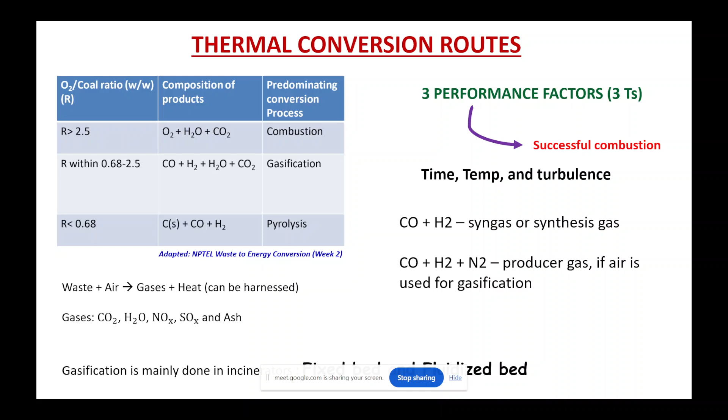Any questions so far? Anyone? No. Okay, so let me continue.

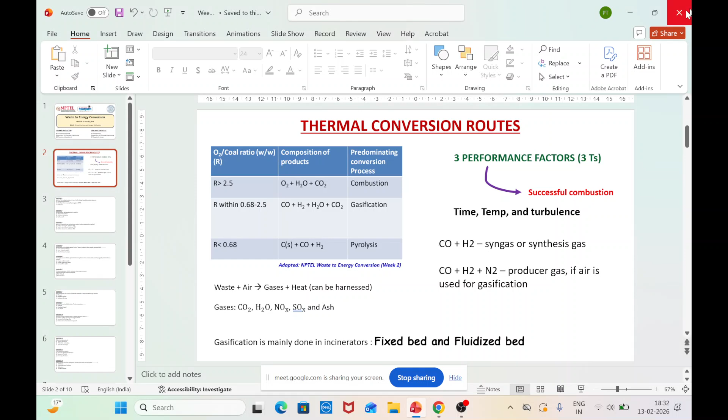What we typically obtain through gasification is syngas. Now, what are the uses of syngas? Before discussing that, let's talk about how gasification happens within the system. For gasification we use something called a gasifier, like the different types of reactors we discussed for incineration. I hope everybody remembers grate firing. Please try to recollect those, because the same type of reactors will be used in gasification.

Gasifiers are the reactors in which the gasification process is conducted. There are three types of gasifiers: fixed bed, fluidized bed, and entrained bed gasifiers. In the case of fixed bed gasifiers, you have two different types.

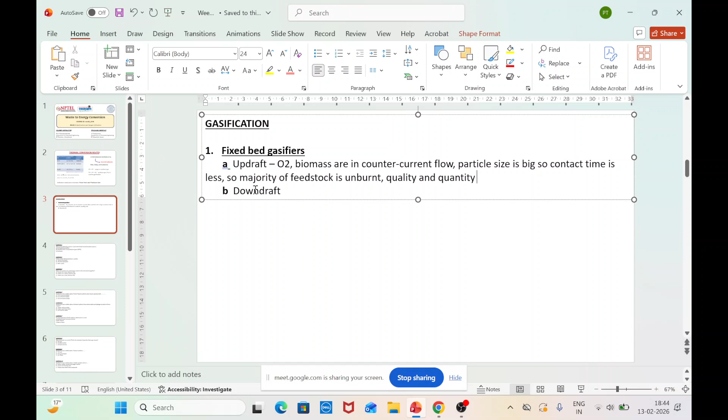I'm going to use the word unburnt. So quality and quantity of syngas is reduced. Syngas temperature is low. Unburnt feedstock leads to blocking and channeling of reactors.

So with this blocking and channeling of reactors, there can be a thought: why can't the reactors be cleaned to remove the scales and deposits generated from this unburnt feedstock? But we have to keep in mind that these gasifiers are very long systems, and cleaning them requires a complete shutdown of operations, and such a process is very time consuming, and commercially speaking it is infeasible. So of course fixed bed gasifiers are being used, but they have many limitations.

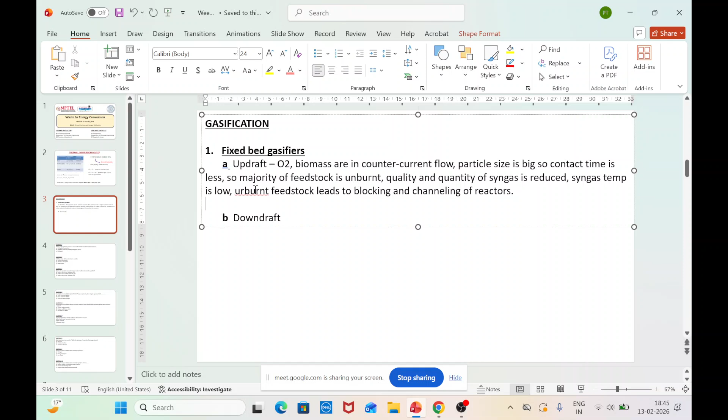In the case of downdraft gasifiers, these problems are reduced. However, there is another problem: scaling up of the gasifier is difficult in downdraft gasifiers. So overall, the temperature required in the case of the fixed bed gasifier is very high, 1500 to 1800 degrees Celsius. So this is where we go for a fluidized bed gasifier, which requires much less temperature compared to fixed bed gasifiers. If you remember, in the combustion or incineration process that we studied last session, we also discussed the fluidized bed and the fixed bed. I hope all of you are able to remember.

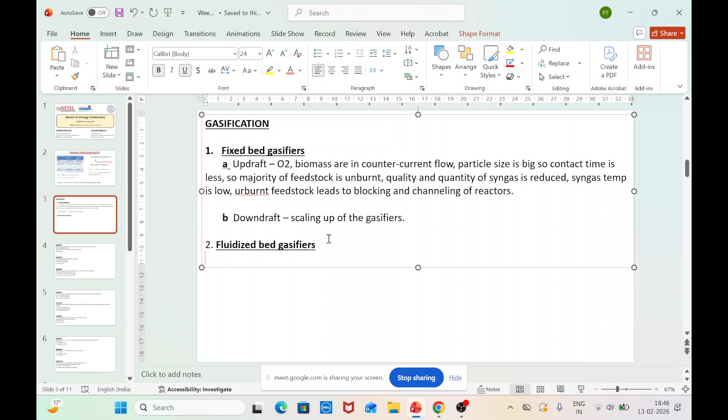So fluidized bed gasifiers are also classified into two different types. Here it will be three, but does anyone know the two different types of fluidized bed gasifier? Yes, we did this last week. It typically depends upon the velocity of the airflow. Circulating, yes. And another one. First one is circulating, and then there is another one. It is the bubbling fluidized bed. And here you also have the third, which is the dual fluidized bed reactor.

Before moving on to the dual fluidized bed reactor, as I said before, the bubbling and the circulating fluidized bed reactors typically differ in the velocity of the air flowing inside. Both of them usually use sand media, and the air is passed inside the fluidized bed gasifier, which causes the sand particles to move. Once you feed the reactor with the biomass, the feed particles and the sand particles come in contact with each other. You also provide temperature, which causes heat transfer, resulting in the burning of the particles, and the gasification process takes place, resulting in the combustible gases.

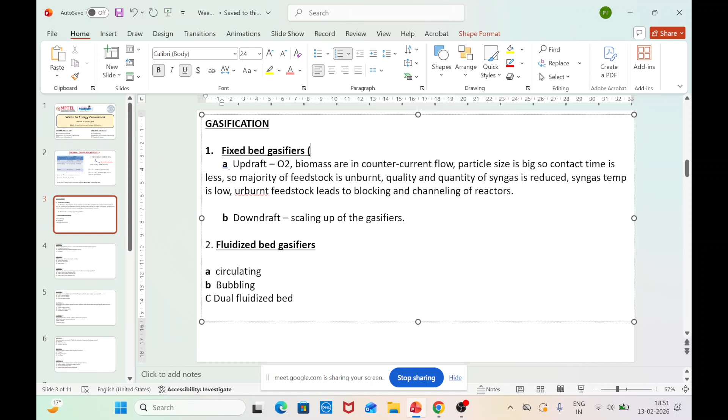So, what is the major advantage of a fluidized bed gasifier in comparison to the fixed bed gasifier? This we discussed in the last session. Okay, let me give a hint. In case of a fixed bed, the operating temperature is between 1500 to 1800 degrees Celsius. However, in case of a fluidized bed gasifier, you can maintain the operating temperature between 900 to 1100 degrees Celsius. So you can reduce the temperature of operation for a fluidized bed gasifier compared to a fixed bed gasifier.

So based on this, I hope you are able to answer why a fluidized bed gasifier operates at a lower temperature compared to a fixed bed gasifier. Yes, anyone? Oh, we had answers, I'm sorry. Oh, okay, no. So anyone who knows why fluidized bed gasifiers are operated at low temperature? Kindly have a look at it. I will state the reason. It is typically because in case of the fluidized bed, the rate of heat transfer is comparatively high.

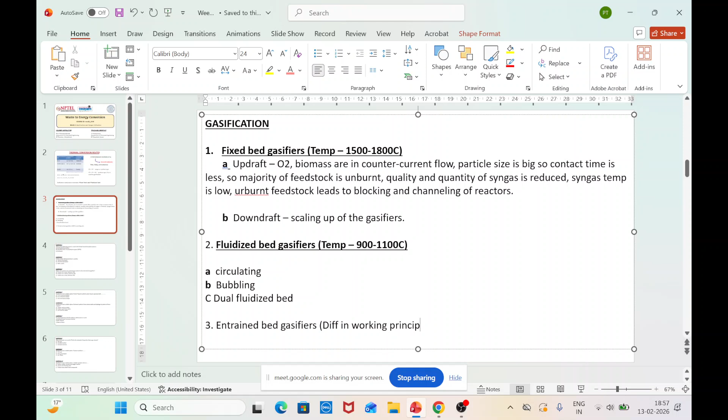So please have a look at them. Difference between all the gasifiers, difference in working principles. So please have a look at it. That's the reason I'm highlighting it with the different colors. So this is about gasifiers. Now I know what is a gasification process. I know how it is basically used. Now let's come to the most important part, that is what are the products that are going to come out of the gasification, which is nothing but syngas. And now how I am going to use my syngas for different purposes.

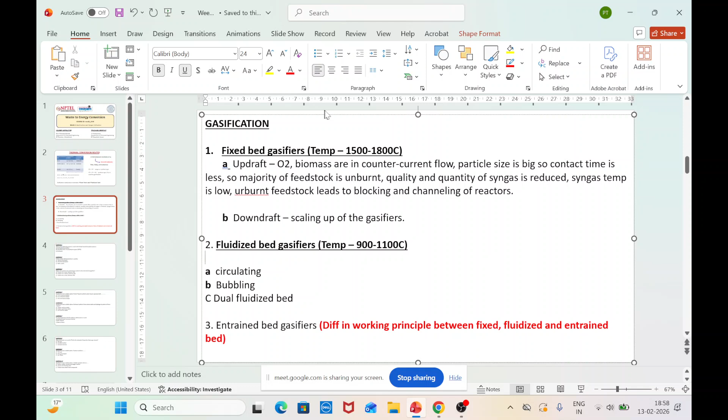So syngas is used for a variety of purposes. Among them, the very first use of syngas or synthesis gas is hydrogen production. This is the first use. Apart from that, the syngas as such can be used to run a gas turbine, and from there you can do electricity generation. And this syngas, depending upon the temperature, you can also use to convert water into steam, and then that steam can be used to run a steam turbine, which also leads to electricity generation.

After this comes something called chemical production. This synthesis gas or syngas can also be used to generate a variety of chemical products. One is methanol and its derivatives, typically speaking, liquid fuels. And another is that it is used in the Fischer-Tropsch synthesis process. Sorry, I think there is some spelling error. Okay. So these are the wide variety of uses of synthesis gas, or syngas.

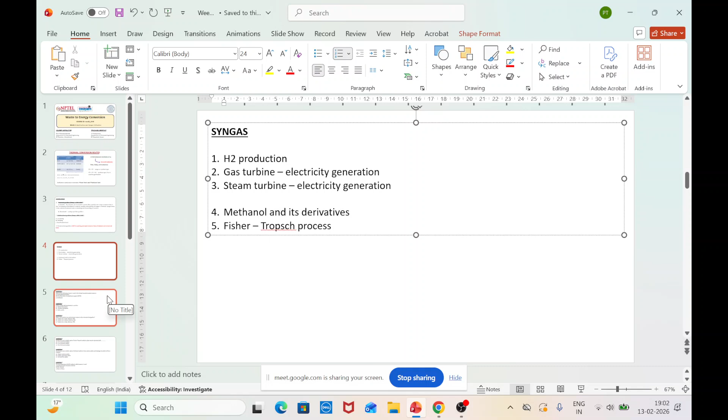Okay. So in case you have nothing to discuss, let's move on to the problems, or the multiple choice questions. The first question is which of the following solvents is used in the Selexol based absorption process. The first option is methyl diethanolamine. Second is dimethyl ethers of polyethylene glycol, DEPG. And third one is methanol.

Which of the following solvents is used in the Selexol based absorption process? Now, before moving on, let me know for what particular purpose we use Selexol as a solvent. Why is this particular question being asked here? What is it in relation to? What are we trying to absorb using these solvents? Or what are we trying to do here? Why do we need to go for all these absorption processes?

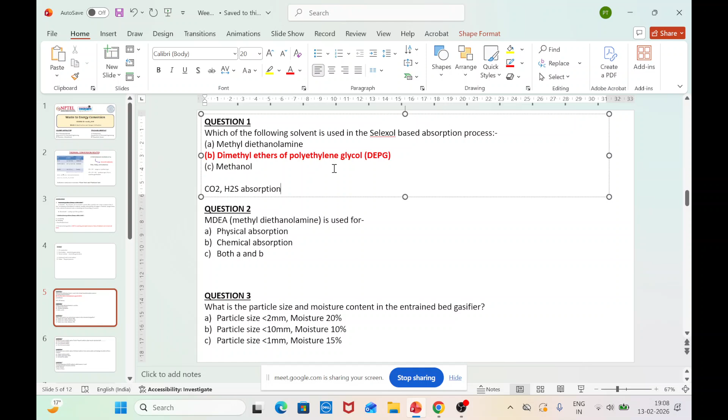So, in case of this Selexol-based absorption process, what kind of an absorption is it? Is it physical or is it chemical? Yes. So somebody has told that we are going to absorb CO2 and sulfur compounds. As such, when it is termed as sulfur compound, we mean H2S, dihydrogen sulfide. So yes, we are going to do CO2 and H2S absorption for syngas cleaning. And what type of absorption process is it? Is it physical or is it chemical?

No, I'm not asking for question two. We are still in question one. So this DEPG, which is used as a solvent in the Selexol-based absorption process. So is this absorption process physical absorption or chemical absorption? This is a physical absorption process.

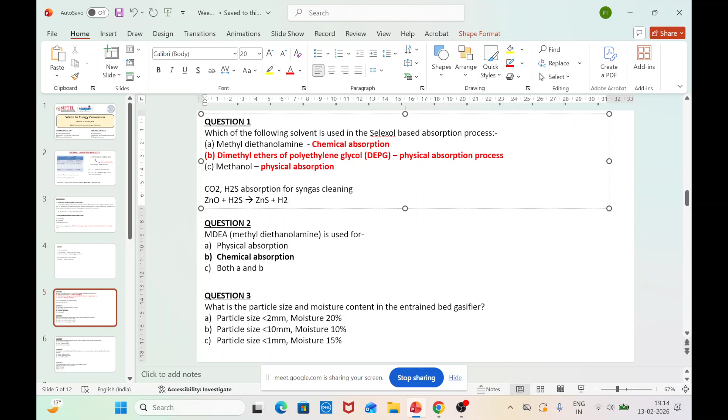So typically the reaction, I will write it here. So zinc oxide will react with the H2S and it will give zinc sulfide plus H2O. Now, just a second. Now, this zinc sulfide will react with oxygen to give back zinc oxide plus sulfur dioxide. So this is the total desulfurization process. So what is the second reaction called? The zinc sulfide is basically heated in the presence of oxygen to give zinc oxide plus sulfur dioxide. What process is this called?

Okay, let me make it more clear. 1.5 O2. Okay, then it will be more balanced. Burning a sulfide in excess of air or excess of oxygen. It is a typical process in metallurgy. It's called roasting. I think I received an answer. Yeah, roasting process.

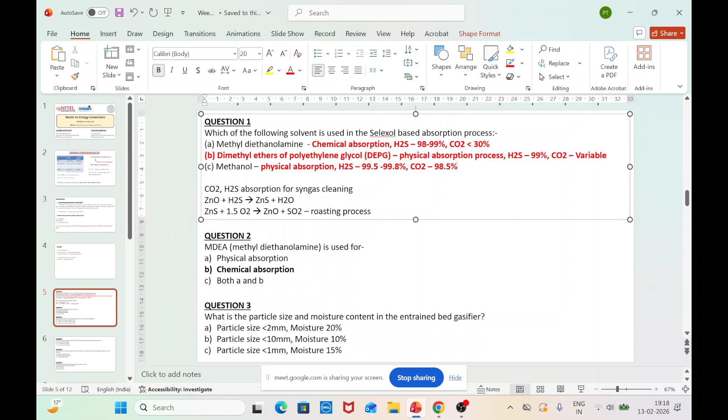So this is about the syngas cleaning. So I hope I have covered the process, and if you have any doubts, you are welcome to ask me. Before we move on to question number 3, again that is also a straightforward question. You are supposed to know what is the particle size and the moisture content in the entrained bed gasifier system. So question 3, anyone, and anyone with doubts in question 1 and 2.

I typically want to go through almost all the options, because sometimes in the exams, as far as my experience is concerned, you may end up with multi select questions also, where you are supposed to select more than one correct option. So it is better to evaluate all the options. I mean, not for all the questions, but at least for few of them, so that you have clarity related to all the options which are being discussed.

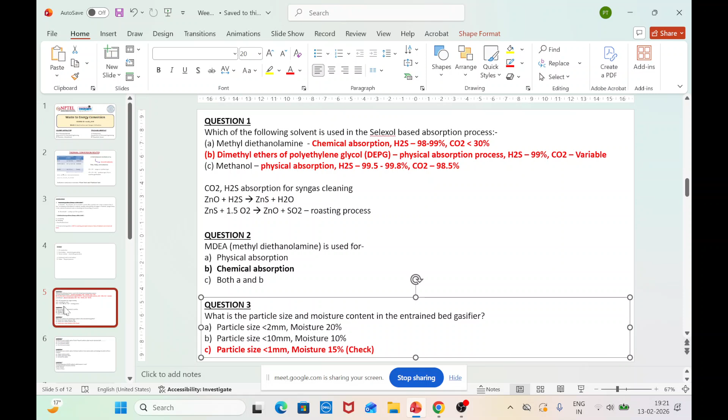For those who are unsure, kindly have a look in the slides for the values, because this is option C. Okay, so this is data which is there in the slide, so please have a look at it. Now let's go on towards our next question. Let's go with question 6 first before moving to oh, sorry, just a second, there is a mistake. So let's go with question 5 before moving towards question 6 and 4.

So this is also one of the ways to utilize synthesis gas. As I said, syngas can also be utilized to form methanol, CH3OH. So now the question is, methanol synthesis from carbon oxides, or you can say CO, and hydrogen happens in the presence of which of the following catalysts? Copper and zinc oxide, copper and silicon oxide, iron and zinc oxide. So apart from telling the answer, please let me know what exact catalyst is used.

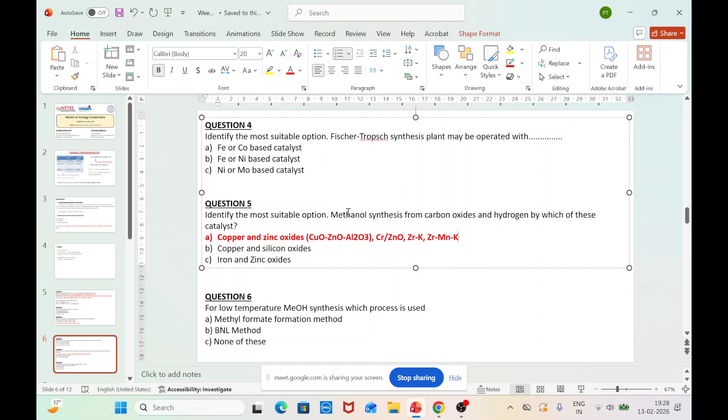So apart from that, what are the typical sets of reactions that happen in this methanol synthesis process? Have a look at those reactions as well. Now we basically go towards our next question. For low temperature methanol synthesis, which of the following processes is used? Is it the methyl formate formation method or is it the BNL method?

Anyone answer for this? For low temperature methanol synthesis, which process is used? Is it the methyl formate formation method or is it the BNL method or is it none of the above two? Okay, two of them have told methyl formate formation method. Then what about the BNL method? That is not used for low temperature methanol synthesis?

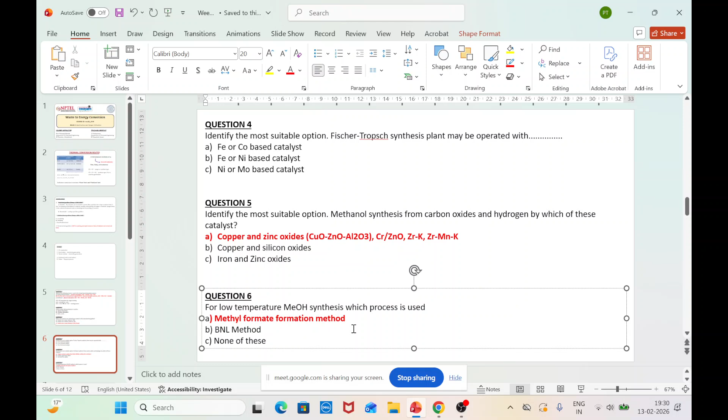MeOH is methanol, so instead of writing methyl or CH3OH, it is MeOH. Me is methyl. What about the BNL method? Oh, what is the full form of BNL? It is the Brookhaven National Laboratory method. Probably that is the place where this reaction was first demonstrated, so that's the reason it is named after that lab. So it is BNL, Brookhaven National Laboratory.

So, as per a few of you in the audience, the methyl formate formation method is a low temperature methanol synthesis process. What about BNL? Is it high temperature methanol synthesis or does it require relatively more temperature compared to the methyl formate formation method? Low temperature. Can I say both are correct answers?

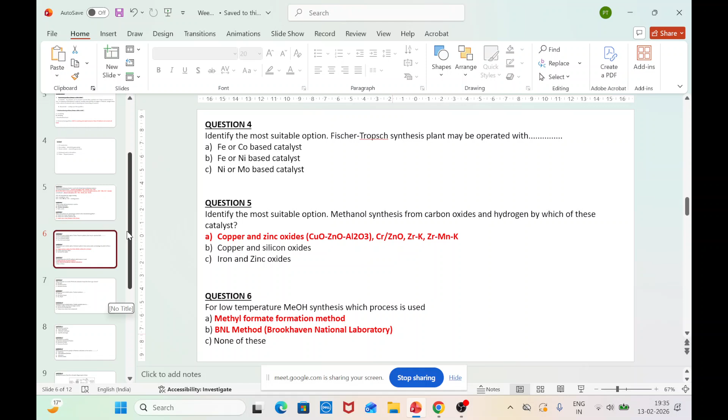Again, please have a look at each of these methods and their particulars. Like, what is the Brookhaven National Laboratory method? It typically employs a nickel catalyst with triethylene glycol dimethyl ether. So all those formation steps as well as the reactions, try to have an idea of what these are, so it may be useful. Okay, let's skip this slide for today because that is more on pyrolysis.

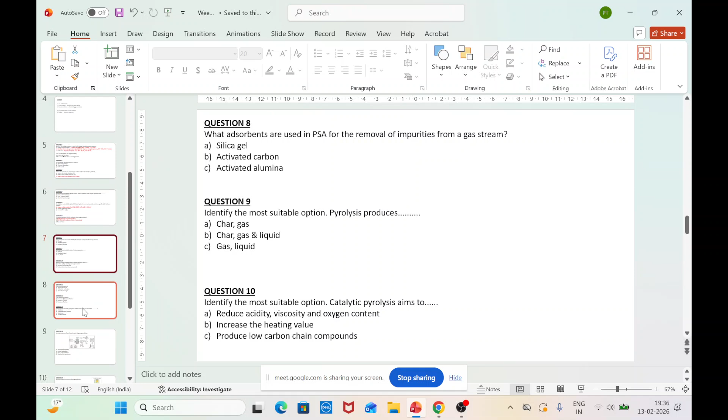Yes, let's go to question 11. SNG primarily stands for supernatural gas, substitute natural gas, or specific natural gas. Let's not do this slide today because it has more questions on the pyrolysis process. You will be able to see this content on Sunday, in our week 4 live interaction session as well. So let's focus on questions 11 and 12.

What is an SNG? The full form. I mean, SNG is an abbreviation. Its full form is asked in this question. So what does SNG stand for?

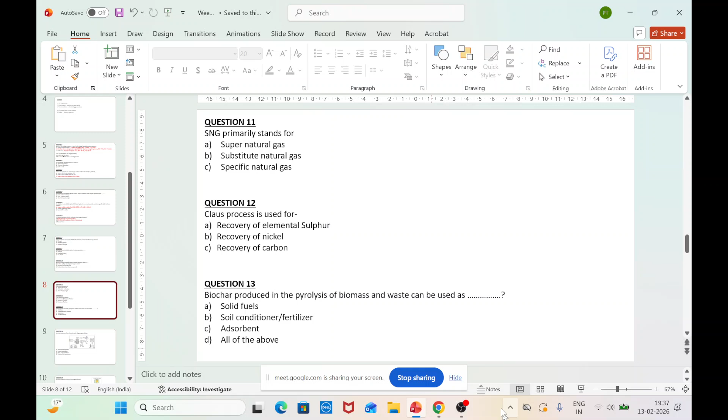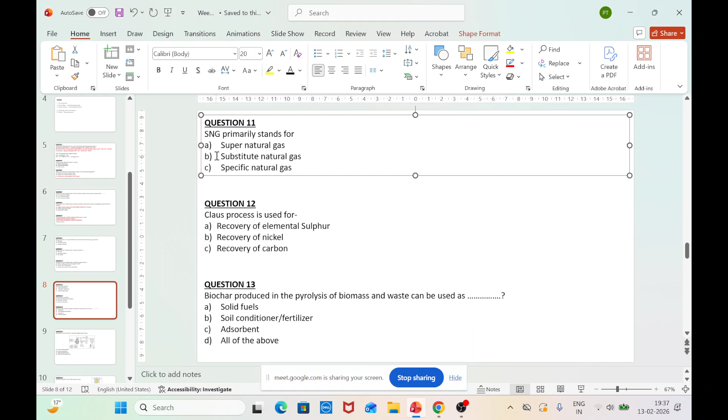It is. So any ideas before I... B? Okay. It is called substitute natural gas, or you can also say it as a synthetic natural gas. So please have a look at these abbreviations in case any of you are not aware of that.

So next, Claus process is used... Now we discussed this a few minutes before. Claus process is used for: A, recovery of elemental sulfur; B, recovery of nickel; and the next option is recovery of carbon.

A, okay. Oh, sorry. So this is recovery of elemental sulfur. So what is the typical reaction for this Claus process? Reaction. Claus process reaction. Yes, I can understand that the Claus process is the one that is used for recovery of elemental sulfur. That is what we discussed in the desulfurization process as well. So what is the reaction?

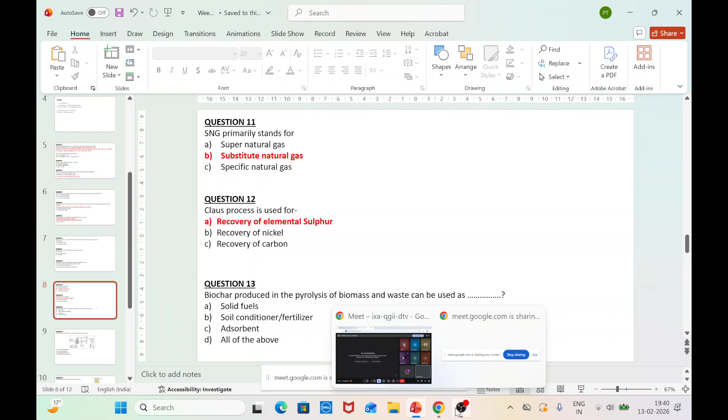Just a second. Okay. We have H2S plus O2 gives SO2. And then that SO2 plus H2S gives sulfur. Just a second. One minute. Okay. So, yes, this is the Claus process reaction, where H2S and O2 react to form SO2, and SO2 plus H2S gives sulfur.

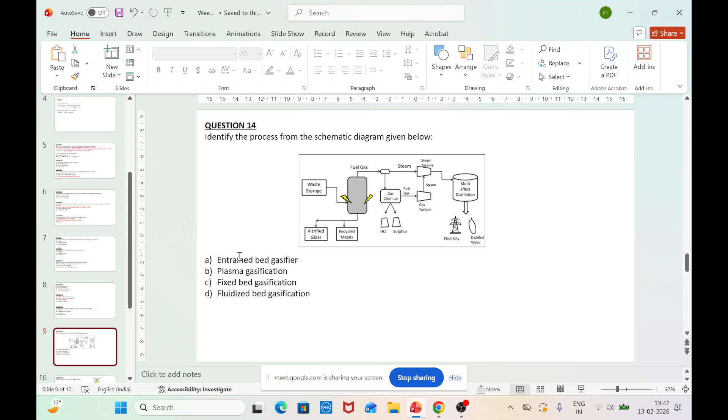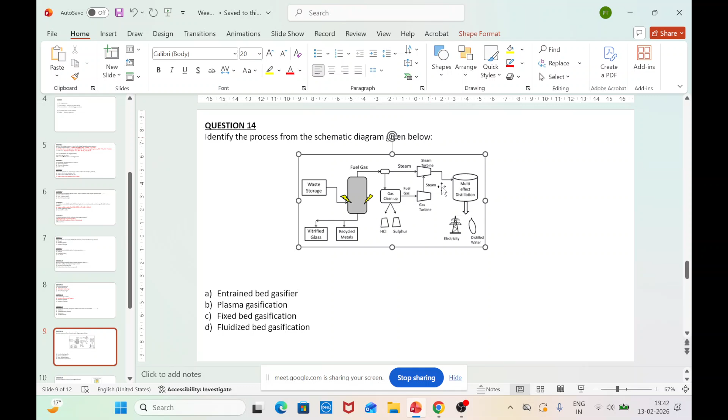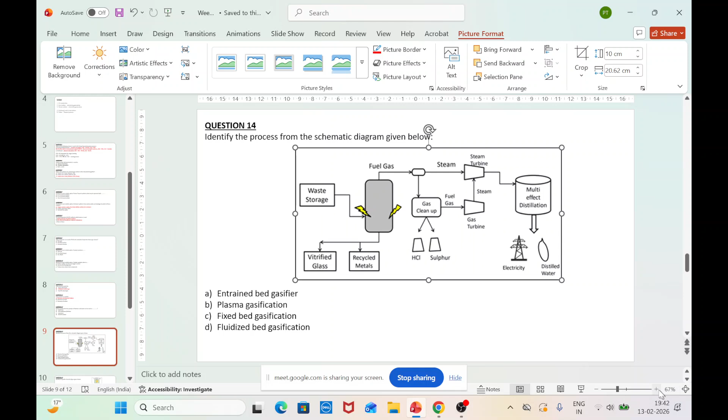Okay. Now, next, let's move on to question 14. Identify the following process in the schematic diagram. Just a second, let me make the schematic diagram a little bit bigger. I hope it is now clearly visible for all of you. So which process is it? B, plasma. Okay, one of you has told it's called the plasma gasification process. Yes, this is the correct option, plasma gasification.

So what you actually do here is apply high voltage. Because of the high voltage, a higher amount of energy, a plasma is created, and this plasma is at a temperature of up to 4000 degrees Celsius. So you can see how hot the plasma is, the fourth state of matter. By using this electrode, you apply a high voltage, a plasma is generated at 4000 degrees Celsius, and this is very well sufficient for burning our carbon based feedstock.

So in the plasma gasification process, the feedstock you don't need to actually worry about. You're going to get a high quality syngas compared to what you got in the other three types of gasifiers, if you remember: fixed bed, fluidized bed, and entrained bed gasifier. In the plasma gasification process, the syngas quality is going to be extremely high.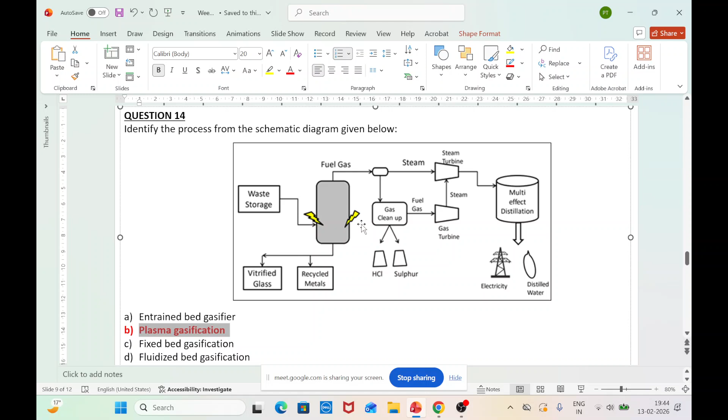The only problem is it is a very new field. A lot of research is still going on on how to optimize this process and what its merits and demerits are. If you are interested, you are welcome to look at those research papers. But for this question, the answer is the plasma gasification process. A hint to identify it is the electric signals, the voltage signals.

What about this question? Identify the gasifier from the figure given on the side. Which type of gasifier is this system? Plasma, entrained bed, double fluidized bed, or circulating fluidized bed? Anyone? It's an entrained bed. Okay, somebody has told it's an entrained bed. It's an entrained bed gasifier. The biomass, steam, and oxygen are added from the top, burnt, and then you obtain the syngas from the bottom of the gasifier.

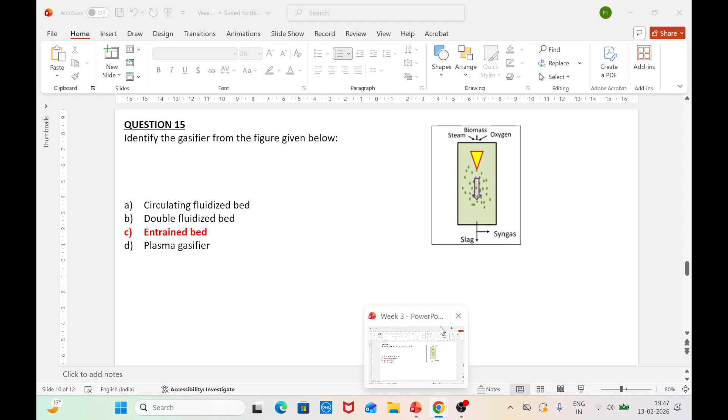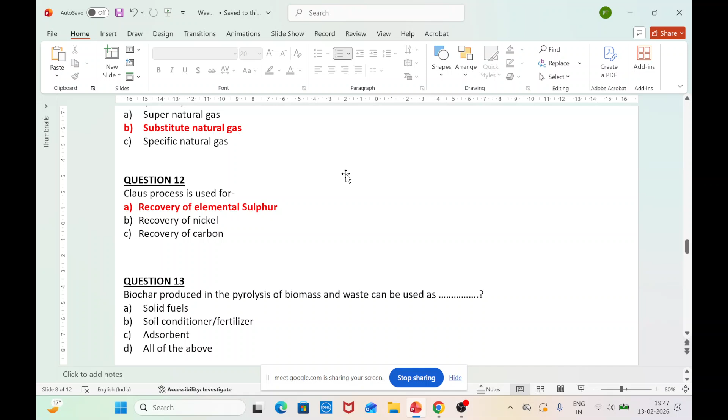Okay, so just have a look at it for this one. If you have anything to discuss... So the reason why I just rushed a little bit in the last two or three questions is basically because we have to solve one problem, and that's quite important. So if you have any doubts, you're welcome to let me know, or we have to solve one more question. We have approximately 20 minutes of time in our hand, and I hope that will be sufficient.

So anyone with any quick questions on what we have discussed so far? The pyrolysis process we will discuss in the week 4 live interaction session. So all the problems or probably the MCQs that were left out for today will be done in the next live interaction session. That will be the session on Sunday, day after tomorrow.

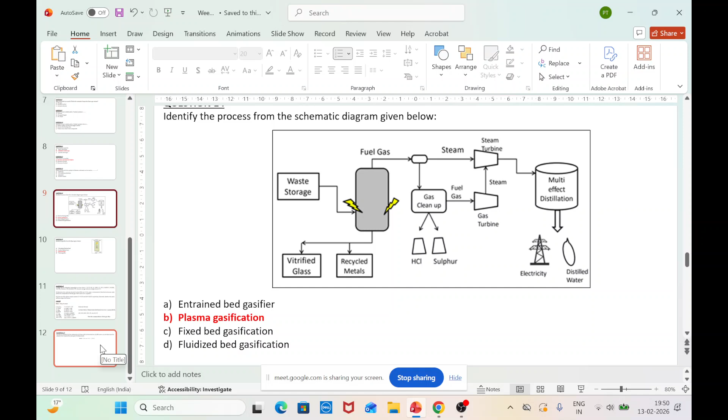Okay, so let's go to the question and let me show you the question. The question is as such, what you can see. You have to develop an equation for the combustion of ethane. I hope all of you know the chemical formula for ethane. You have to develop an equation for the combustion of ethane if it is burnt in A, theoretical or stoichiometric quantity of air, and B, in 40 percent excess air, and determine the amount of air required for each gram of ethane

that is getting burnt. So first is develop an equation for the combustion of ethane if it is burnt in the theoretical requirement of air, and the second one is in case of excess air, which is 40% in excess as per the question. Once you develop that equation, you are supposed to calculate how much air will be required to burn 1 gram of ethane, and the empirical chemical equation is below: CxHy plus nO2 gives xCO2 plus yH2O.

Oh, sorry. Some problem. Anyway, leave it. I'll just write it once again.

So can I write it as CxHy plus n times oxygen plus 3.76 nitrogen gas gives xCO2 plus yH2O plus 3.76n N2. Just let me correct this.

Is this correct? Because since nitrogen is not going to react with your hydrocarbon, that many moles of nitrogen entering the system or burning with the hydrocarbon is going to be emitted out as a product gas. Is this correct? The number of moles on the reactant and the product side should be equal, by the law of conservation of mass or moles.

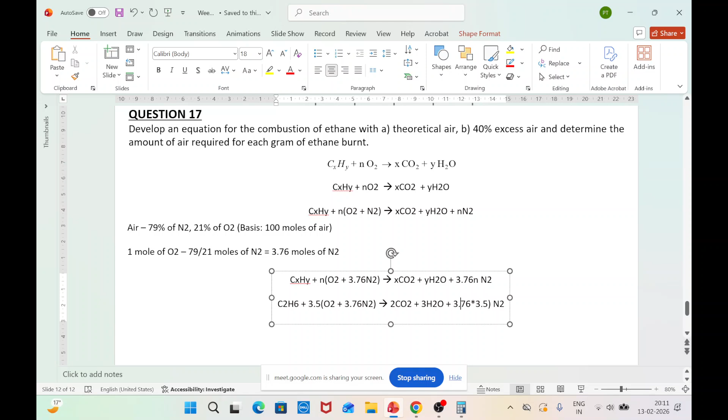So this is the chemical equation. I now need to make sure that everything is balanced. For two carbons on the reactant side, you will have two on the product, and with six hydrogens, three. So the amount of oxygen will be 7: 2 times 2 is 4, 4 plus 3 is 7. So this will be 3.5. So 3.5 times 3.76. Here the value of n will be 3.5. So now you need to multiply this.

Let me copy this again. So 3.76 times 3.5 is 13.16. So this value is going to be 13.16 moles of N2. This is the combustion equation of ethane with the theoretical air requirement. Now we know this balanced chemical equation. What we want to know is, if you use 1 gram of ethane, how many grams of air is required? It's based on the molecular weight; you need to calculate that. So can you let me know how much air is required?

Molecular weight of C2H6 is 30 gram per mole. Now, for every 1 mole of C2H6, you have 3.5 moles of oxygen plus 3.76 moles of nitrogen, or you can say 4.76 as total air. So now you just need to do the math. Please let me know what will be the answer.

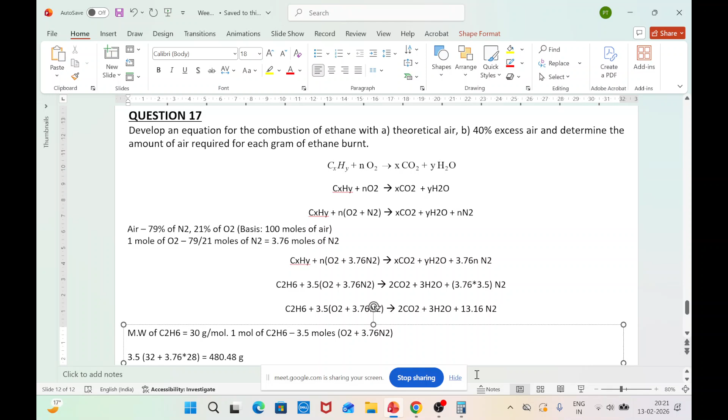22.4224. Oh, okay, for 40 percentage of excess of air. Let me just check it once. Just a second. Yeah, the answer is right. It's 22.4224. So then, okay. So with that, let me just stop sharing. I'll post one question in the chat box.

So the question is, how much amount of excess of nitrogen will be obtained in the product side if we use 40 percentage of excess of air compared to the theoretical air requirement? So kindly calculate this as well, and then let's see in the next live interaction session.